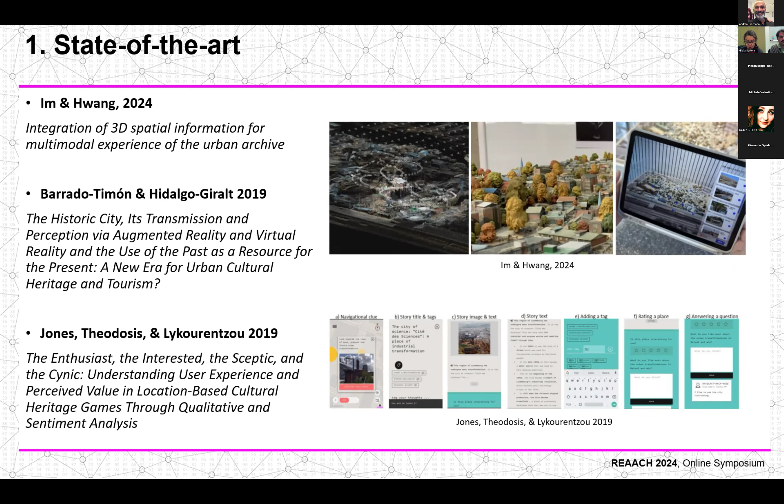The second study by Timón and Giralt addresses the impact that augmented reality and virtual reality have on our conception, evaluation, and use of urban heritage spaces. The third instead addresses the theme of urban discovery by designing a game with an interface capable of triggering historical reflection on the user experience.

In this slide, we present the workflow adopted for this work. We started with a historical and philological study of the square, followed by the acquisition of metric data with a laser scanner, and we then developed a three-dimensional reconstruction of the building on Revit 2025.

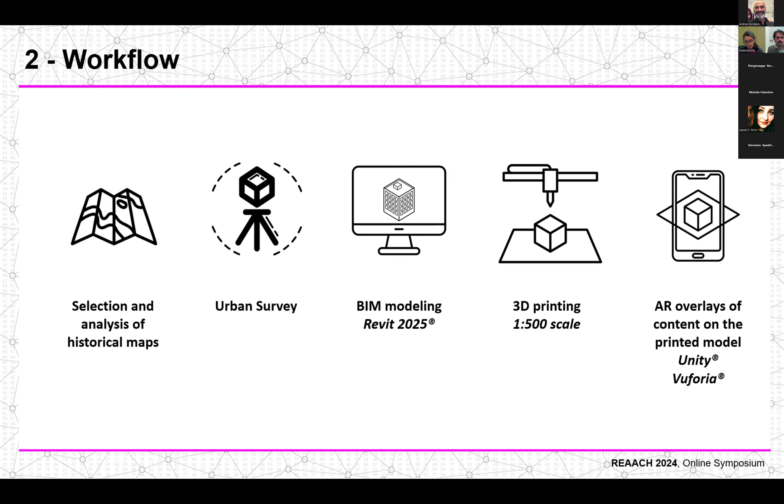We created a 1:500 scale 3D printed maquette of the plaza, and conducted AR experience tests applied directly on the real model with Unity combined with the Vuforia engine. The ultimate goal is to be able to bring the past to life in a tangible and interactive way.

As for our case study, the reference area is Piazza Quattro Marzo, located in the center of Torino, near the Duomo, the Palazzo Reale, Palazzo Madama, Via Garibaldi, Via Po, and Via Roma.

This square is now the result of successive changes made at the end of the 19th century through a redevelopment plan that affected several areas of the city center.

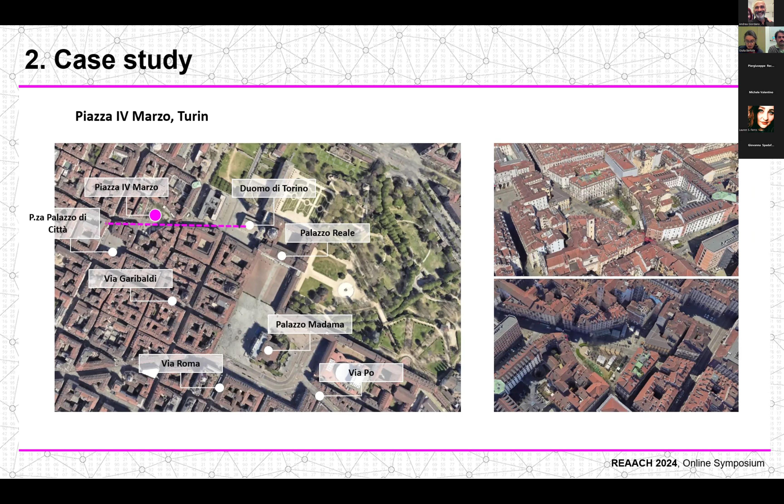The demolition of dilapidated streets and buildings led to the definition of a diagonal layout that briefly joins the Duomo to Piazza delle Erbe. The facades of some restored buildings facing the new square testify to the medieval origin of these building complexes, built on the Roman layout that survived for nearly 2 millennia.

As for the preparation of the content and the initial morphological reading of the square, some of the historical maps of the city of Turin have been consulted to date. The oldest is the Caracha axonometry, dating from the late 16th century.

The 17th century plans drawn by military engineers, although drawn to study the modernization of the fortification, still provide a timely and geometrically accessible survey of the city. These maps show large-scale intervention that further deconstruct the urban layout of the whole city.

The following century, the coordinated plans for the rectification of the main artery road with the reshaping of the building fabric will permanently annul the medieval structure in many other areas of the whole center of the Via Palazzo di Città.

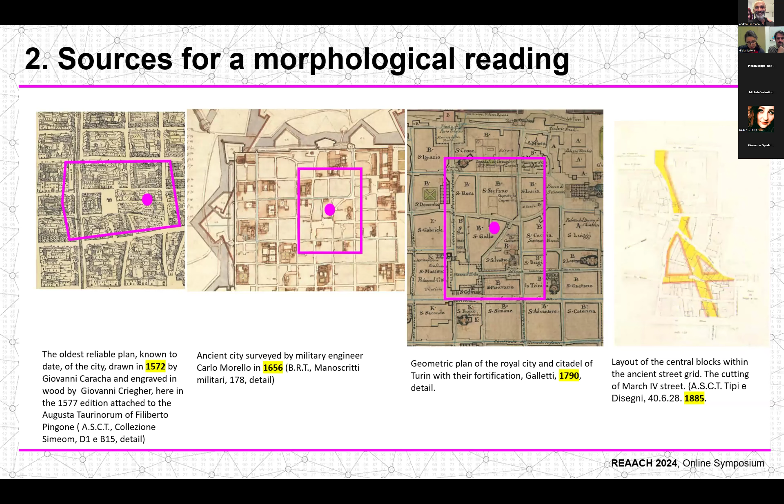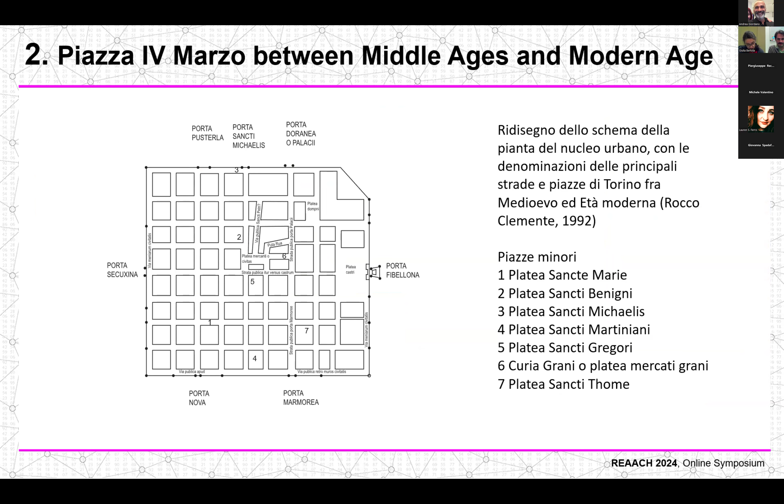From this map, content was selected and graphical rework done. Shown here is a schematic of the plan of the urban core with the name of the main streets and squares of Turin between the Middle Ages and the modern age.

Also visible is the subdivision into the four neighborhoods and the positioning of the Piazza Quattro Marzo area within the Porta Doranea district, a neighborhood that extends into the northeastern part of the medieval city, enclosed by the walls that from Porta San Michele reached through the area now by Giardini Reali to Palazzo Madama, the medieval castrum Porta Fibellona, and within the city by the streets corresponding to Via Garibaldi and Via Milano.

It is the liveliest quarter of the 14th-15th century Turin. It is traversed by the northern track of the ancient Cardo Maximus, which at Porta Doranea joins the busy roads to Asti and Vercelli. To the south, the other Strada Pubblica terminates at the Savoia Castle and the adjacent Porta Fibellona, also an important junction point between the city and the outside.

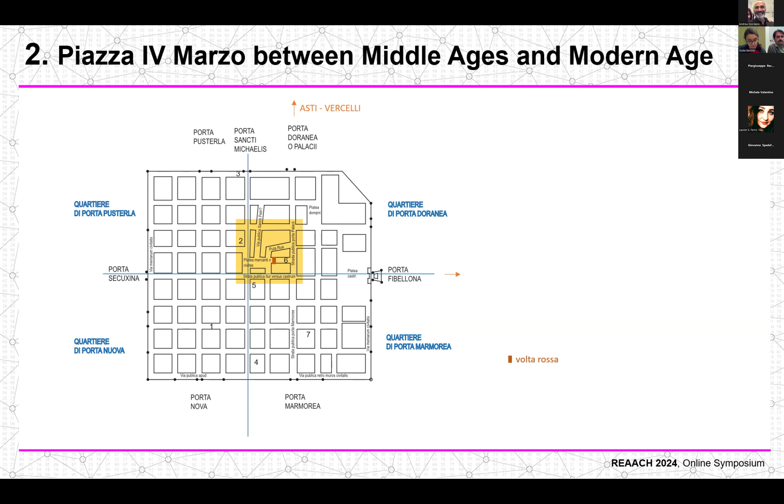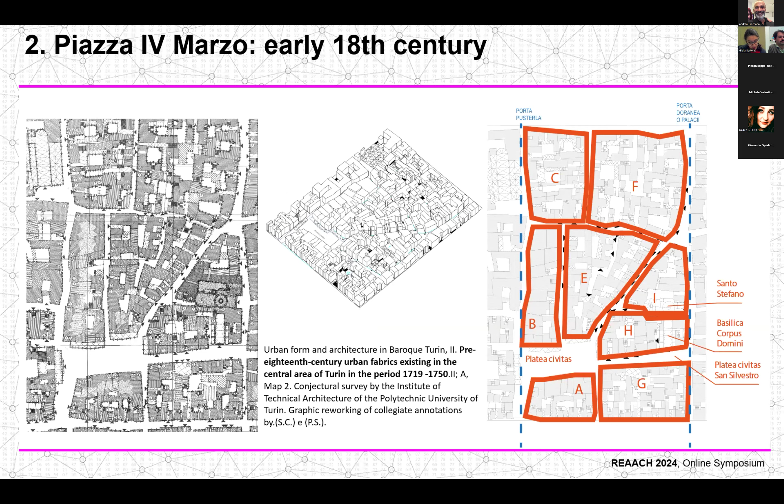Here we also see the area of Piazza Quattro Marzo and the Platea Civitas unaltered.

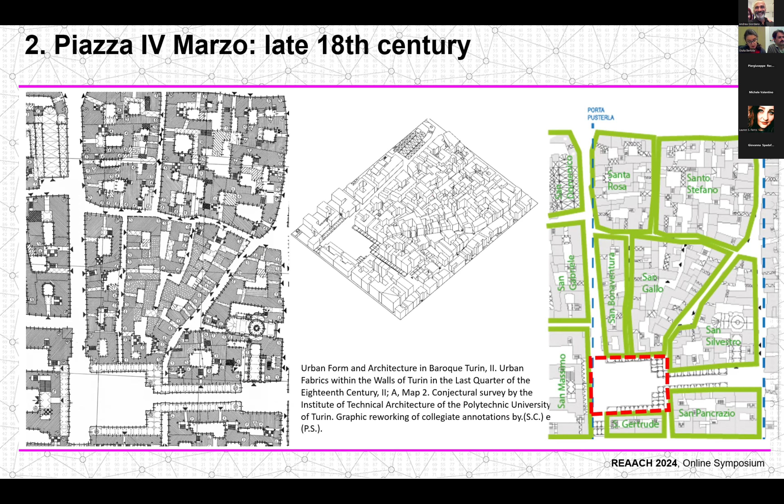Reaching the present day, the primary reference sources have been the technical map of the city of Turin and its portal, updated to 2023, and a laser scanner survey carried out by our research group also in 2023. The laser scanner survey was quick, carried out in the early morning from dawn, so as not to have many occlusions due to the venues scattered around the square, and was used as a supplementary tool to a work that takes most of its information from the technical map, which has a scale of 1 to 1000.

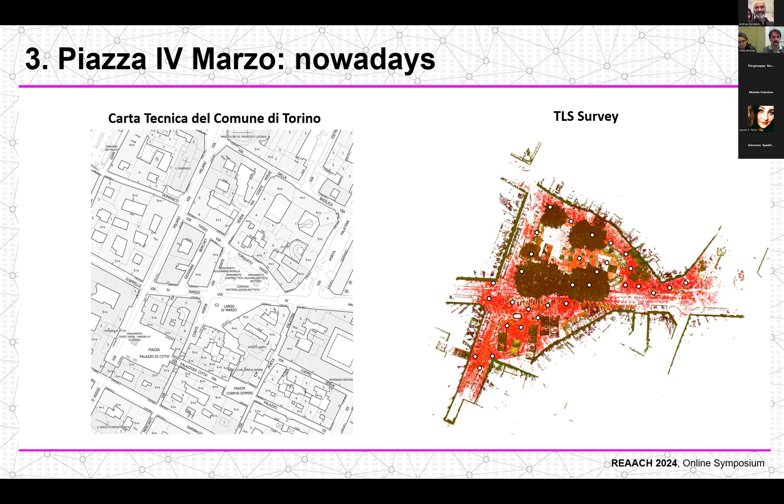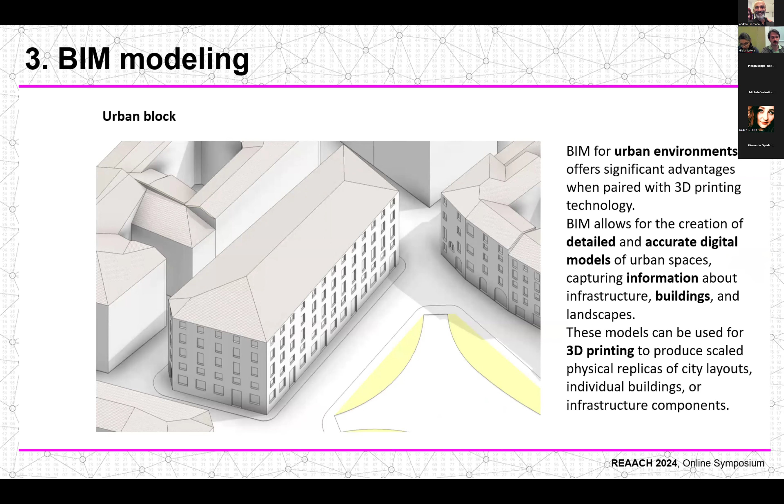The modeling of the actual state is the first operational phase. The modeling phase inside Revit 2025 met one of the first goals of this research, which is 3D printing at a specific scale, 1 to 500. Working at urban scale on software more common at the architectural scale requires solving some issues at all stages of the work, taking a building as an example.

First of all, a minimum size was used for the thickness of the walls to allow for the support of the model itself and the insertion of any openings in the wall. The same logic was applied to the construction of the roof, which was created without prominent roof pitches to avoid excessive support when printing. The creation of the roof was one of the most time-consuming operations, despite the simplicity of some Revit operations for the construction of roof pitches where the building is very regular, but this is not our case.

At the modeling level, for the buildings facing the square, it was decided to enrich the model by inserting the relevant doors and openings simply as undercuts, but taking the correct typologies, which were also very varied, with consequent parameterization of the families, and thus the construction of a simplified urban model. The next step in the work, exploiting the potential of the software, was to build various models in the same scene according to the historical phases that we'll see in a moment. The modeling will only be by masses, because we do not have the amount of information of the current state, but it becomes interesting in the integration between the various models.

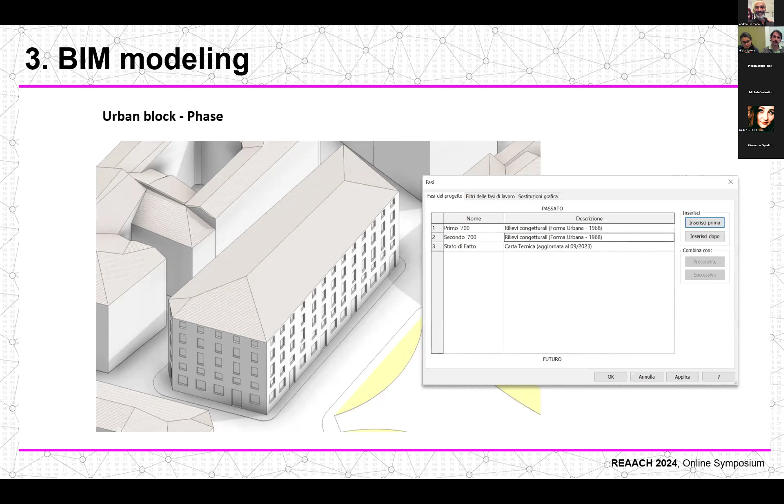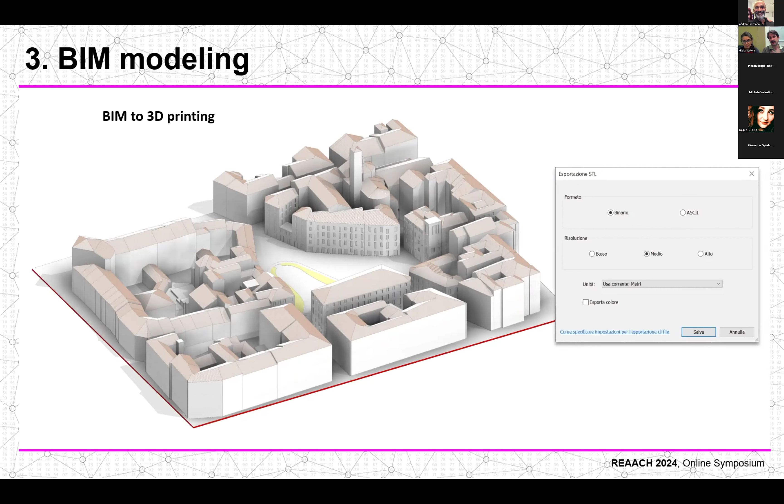Finally, this is the model made in Revit of the current state of the blocks gravitating around the square. As we wanted to use a limited amount of software, starting with the isolated views of city blocks, we proceeded with the export in STL format of the blocks. This export was done using block criteria of size and complexity to keep the next printing phase between 1 to 5 hours. Here, within the Bambu software, the 3D printing software, some blocks directly exported from Revit are brought onto the plate as an example.

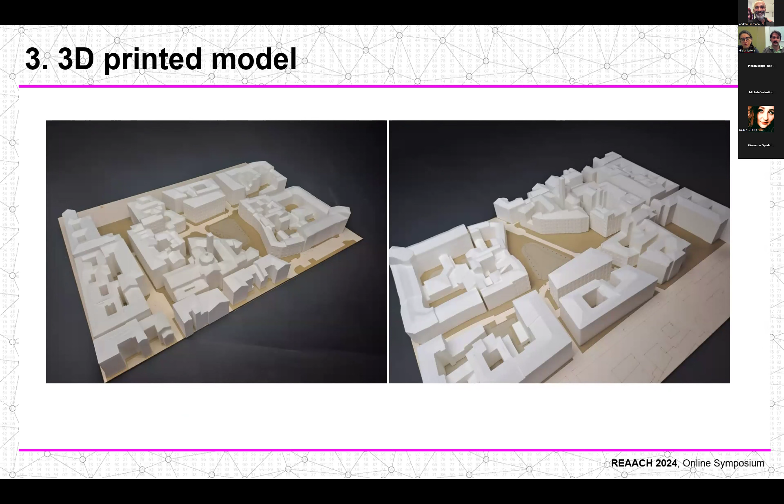And here is the assembled model of the various blocks with an overlay of laser cut boards to complete the study area. As mentioned earlier, within the same file model, there are volumetric models of two specific historical periods of the square. They will be exported with the same criteria of limited software use and inserted into the various AR applications.

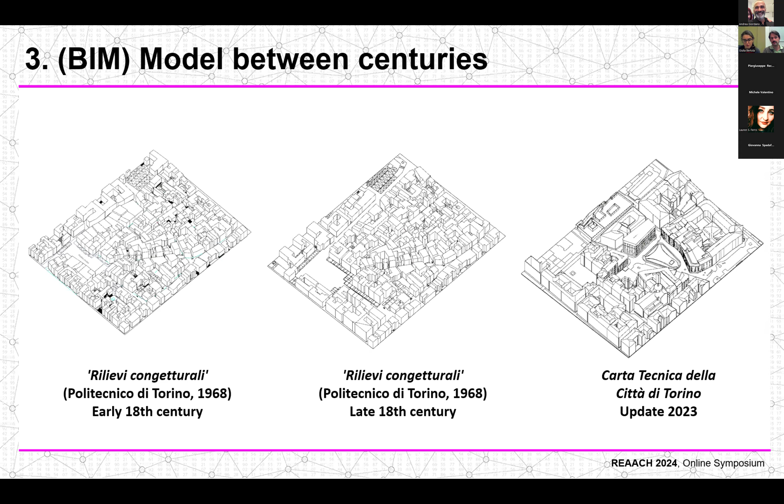Procedurally, it was chosen to set up the work on two scales, the first urban and the second architectural, and to realize the AR experience with Unity combined with the Vuforia engine. Vuforia supports different types of 2D and 3D targets, including image targets, 3D multi-target configurations, and a form of addressable fiducial marker known as VuMark. The intent of the developed application is to overlay information about the generative geometric operations onto the physical model, adopting markerless anchoring. This approach is based on camera orientation and automatic recognition of geometric features in the real environment. In this specific case, these features are represented by the printed 3D model, which in this way acquires the dual role of a means of representation and conduit of interaction processes.

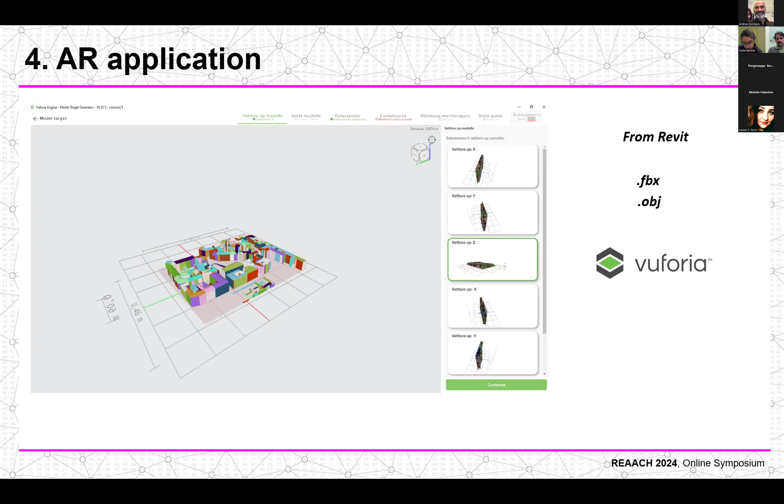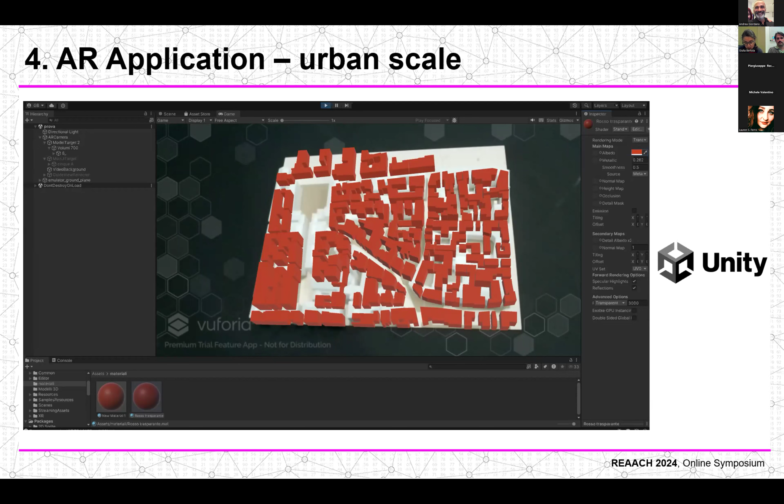The application was realized using the AR camera and Vuforia Model Target Generator. Within Unity, it is possible to upload a digital model in full-scale OBJ format, which allows the Vuforia engine to better track the real object. It then prompts for the dimensions of the model expressed in meters, and finally, the creation of the guide view occurs: an image file that traces the real 3D model from the same viewpoint from which you want it to be framed when using the app. At the end of the procedure, the model target is exported to a Unity package file to be imported into the project on Unity. In this slide, we see the test overlay between one of the three-dimensional models, specifically the late 18th century model, with the actual model.

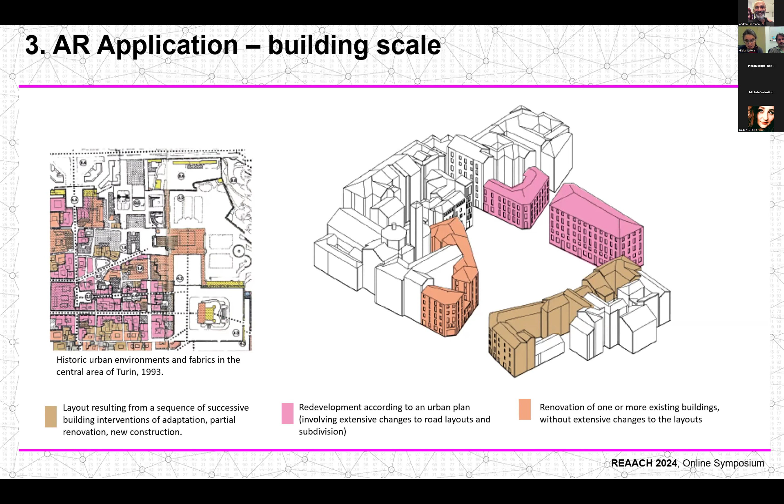The same procedure was adopted for the architectural scale. From the data obtained from the study by the Polytechnic University of Turin in 1993, building blocks have been identified and information is being organized regarding epoch of construction, building renovation interventions, or building characteristics. Here we see an example of content realization from documentation and the related AR application test.

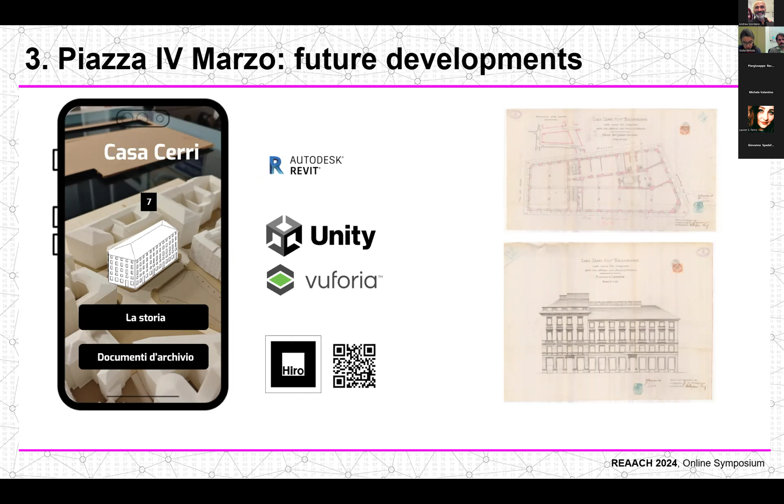In conclusion, the intent of this work is to build a tool, a graphical interface that allows the user to visualize how certain portions of urban fabric have changed over time by bringing together static content, such as historical images and archival documents, and dynamic content, with the hope that such a technological tool will facilitate the dissemination of information, providing a quick, simple, and new approach to knowledge, while being careful, however, of the risk associated with the trivialization of the visitor experience and the disconnection from urban reality and cultural heritage itself in spatio-temporal terms.